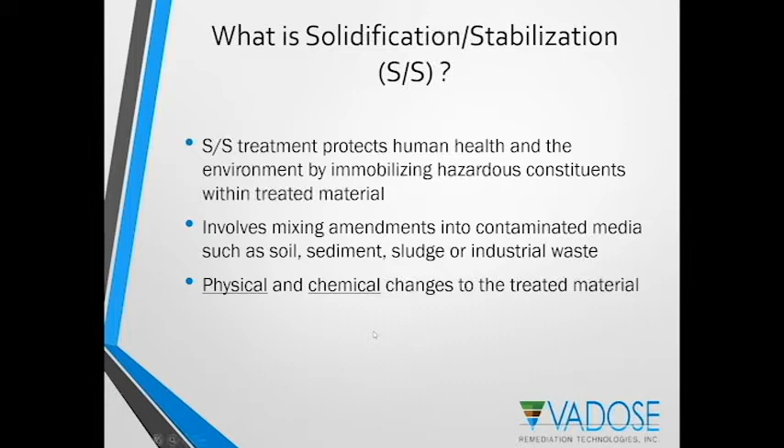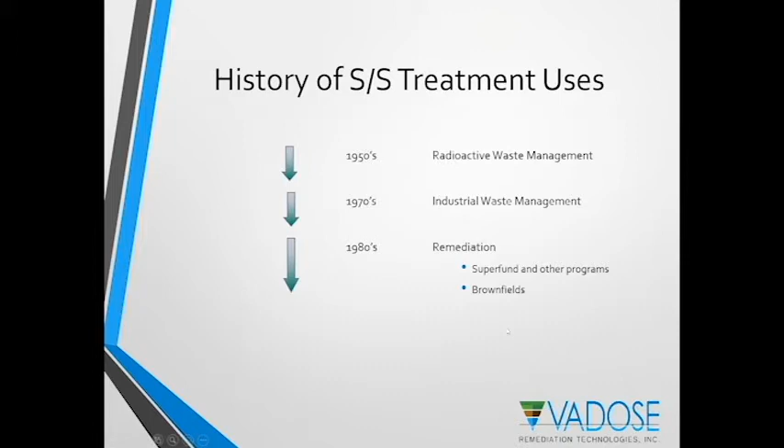First, a little history on solidification and stabilization. This technology has been around for quite a long time, having been used in the 1950s for stabilization of radioactive waste, later adopted in industrial waste management in the 1970s, and then in the 80s used in more remediation applications at Superfund and other environmental remediation projects.

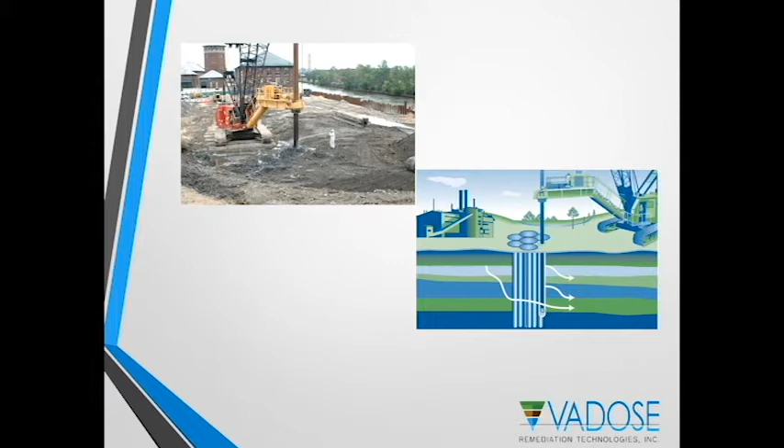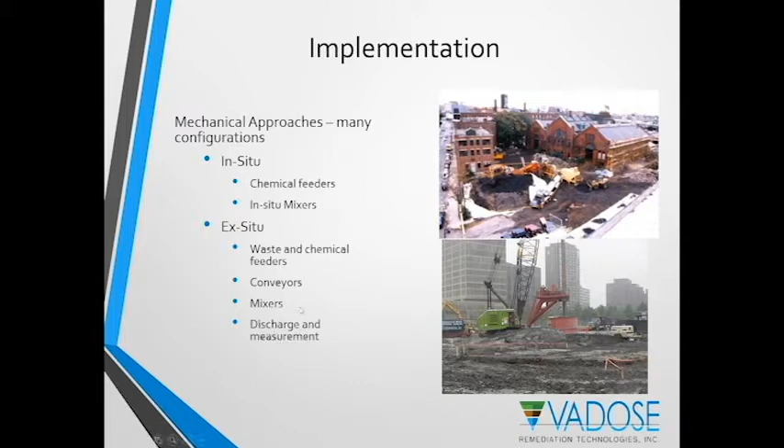It can be done in a number of different ways, typically mechanically mixed for in situ applications, which would involve chemical feeders ultimately feeding these amendments into the mixing head so that amendments would mix uniformly into the soil. Solidification or chemical stabilization can also be done in ex situ applications, which may involve chemical feeding and other mixing equipment.

Some basic principles of stabilization: for organic contaminants, the primary objective is to enact physical changes to the media, essentially things like compressive strength or permeability. We want to affect those properties of the media to result in reduction of mobility of those contaminants. Secondarily, chemical changes might also be enacted, which might include in situ geochemical stabilization or reducing the leachability of certain contaminants from the soil.

For inorganic contaminants, typically the primary objective is chemical change, which might mean adjusting the pH to reduce the leaching of contaminants such as metals, and secondarily the objective might be to chemically solidify in place the contaminants. The chart on the right illustrates the amphoteric nature of various metals. For example, lead between pH 9 and 10 has the lowest solubility. So by controlling pH, we can stabilize that material and reduce its leachability.

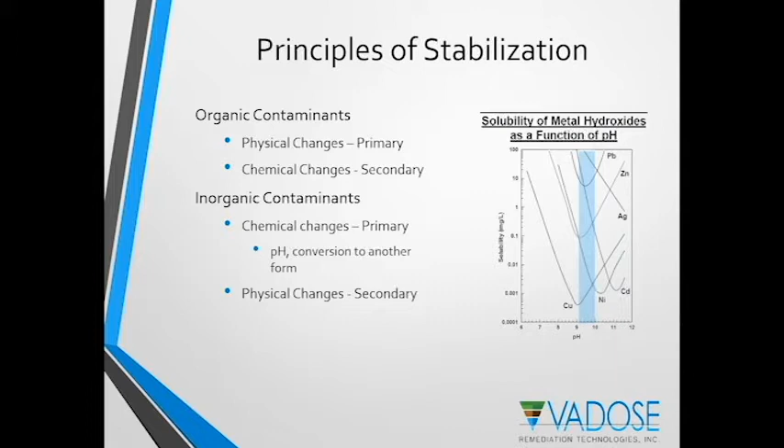Some typical tests done in the feasibility and mix design process include, for physical testing, hydraulic conductivity - that's the picture in the middle showing triaxial permeameters measuring the rate of flux of water through the solidified sample. We also test unconfined compressive strength. Other tests might include freeze-thaw durability or wet-dry durability, free liquid tests such as the paint filter test, moisture content, and density.

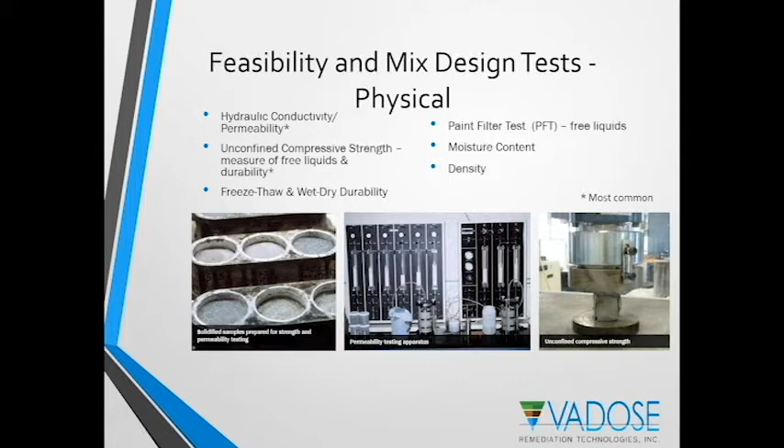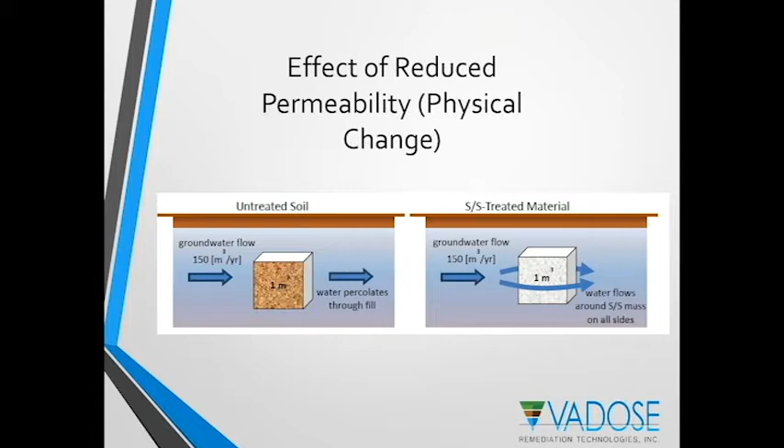The purpose for reducing the permeability is to reduce groundwater contact with that solidified mass. As the illustration shows, as groundwater percolates through a contaminated mass, it picks up contaminants as it flows through. By reducing the permeability, you're able to redirect that flow around the solidified soil mass, reducing the mobility of those contaminants.

Some typical physical performance properties evaluated: I mentioned unconfined compressive strength - often the design might call for a compressive strength of 50 psi. It is very much site specific, and not always a requirement depending on how the site will ultimately be used. Hydraulic conductivity, or permeability of 1 times 10 to the minus 7 centimeters per second, is a typical goal for solidified soil with organic contaminants.

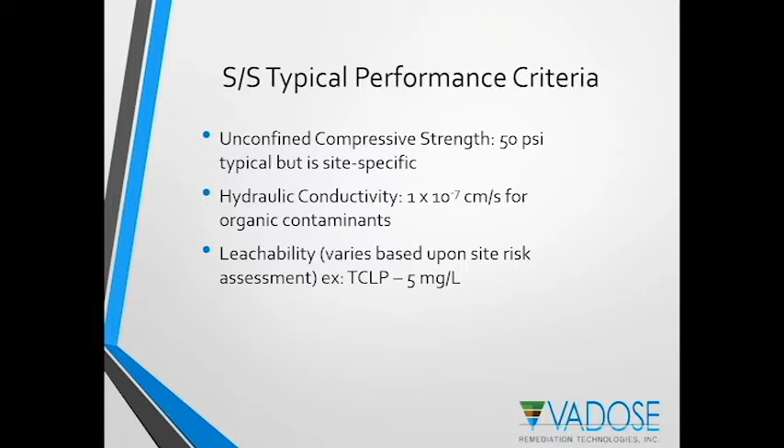And finally, leachability - the ability of these contaminants to migrate out of the mass. An example is the TCLP test for metals. If you have more than 5 milligrams per liter of leachable lead, for example, that's a performance criteria showing that soil would be considered hazardous waste.

Further to leaching testing for chemical analysis of these solidification or stabilization methods, I've mentioned the TCLP. Essentially, the toxicity characteristic leaching procedure is intended to evaluate whether the waste is considered toxic, hazardous, or non-hazardous, depending upon that criterion. This involves using organic acid and essentially percolating it through a crushed monolith, intended to be a 100-year simulation of materials that had been co-disposed with organics in a municipal solid waste landfill.

The next test is the synthetic precipitation leaching procedure, or SPLP test, method 1312. This test uses an inorganic acid with a pH of 4.2, also on the crushed monolith. That pH can be adjusted to be more representative of precipitation in a particular part of the country. This test too is intended to be a 100-year simulation, to simulate leaching from repetitive exposure to acid rain. This might be a more appropriate test to run if you're simulating materials that had been stabilized and left in place, rather than trying to determine if it is characteristically hazardous or not. So an SPLP test might be chosen instead.

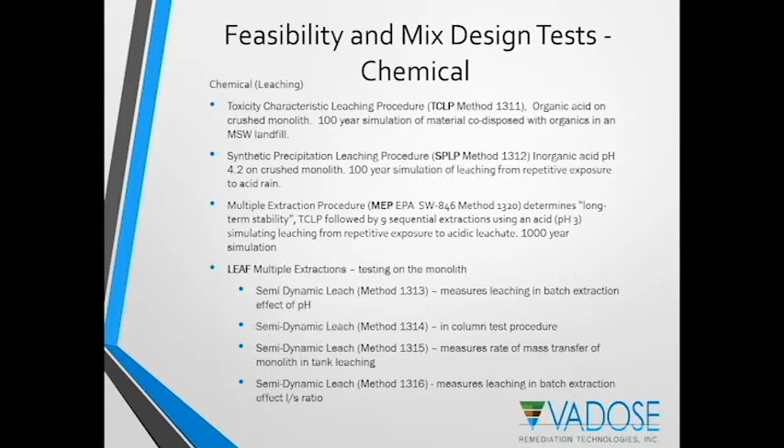So essentially, depending upon how much liquid there is in relationship to the solid, how does that affect leaching of these contaminants? A little bit more about the LEAF method, specifically the 1315 method: it's been developed to determine the mass transfer release rates of the COCs from a low permeability material under diffusion-controlled release conditions. As I said, it's one of 4 different LEAF methods which were developed as a collaboration between the US EPA and a number of other research organizations.

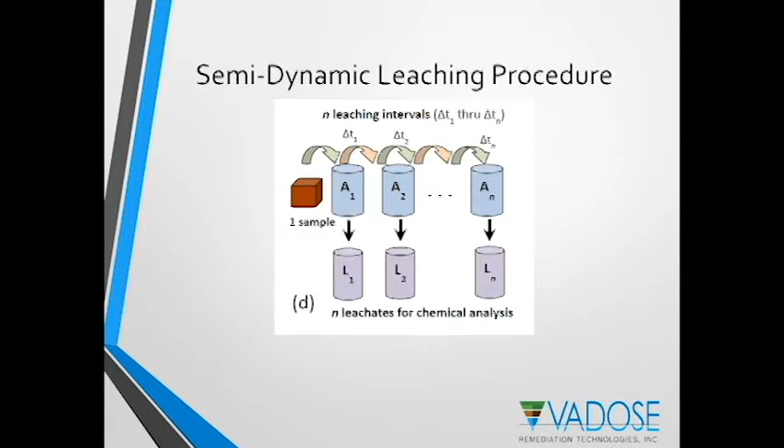Just an illustration of that: essentially, as we've described, you're taking multiple extractions from the solidified mass, depending upon what you're evaluating for, over N number of intervals, and using that data to determine the performance of the solidification and stabilization. So what are these agents that are used for solidification and stabilization?

Portland cement is a generic material. It's been produced by a number of companies all over the US and all over the world. Obviously, the cement is used—it's the same cement used in the creation of concrete, which contains Portland cement and aggregates as well as water. In this case, we're using the cement in a solidification and stabilization application.

It's been used for a long period of time. Portland cement is very commonly used to immobilize the contaminants. As we know, it sets up and creates a high compressive strength, and when it's stabilized in a solidified monolith mass, it is low in permeability as well. These materials are manufactured to standards created by the ASTM and the Portland Cement Association, ACI, American Concrete Institute, so therefore you can expect very uniform, very high uniformity there.

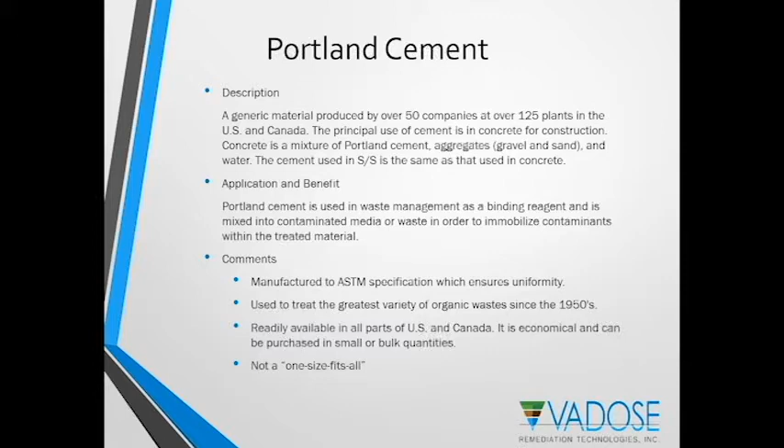They're readily available, but it's not necessarily true that Portland cement is the magic bullet that fits all solidification and stabilization applications. We're going to talk about stabilization of PFAS compounds, and we're going to see the effect that Portland cement has on that. It's some interesting data which I'll be sharing with you later in the presentation.

The next amendment used in solidification and stabilization is sodium bentonite. This is a high swelling clay composed of the mineral sodium montmorillonite. It's often used as an additive to Portland cement mix designs to further reduce hydraulic conductivity. It too is produced to specifications consistent with the API, American Petroleum Institute, and is available from various manufacturers around the country in a wide range of particle sizes for various applications.

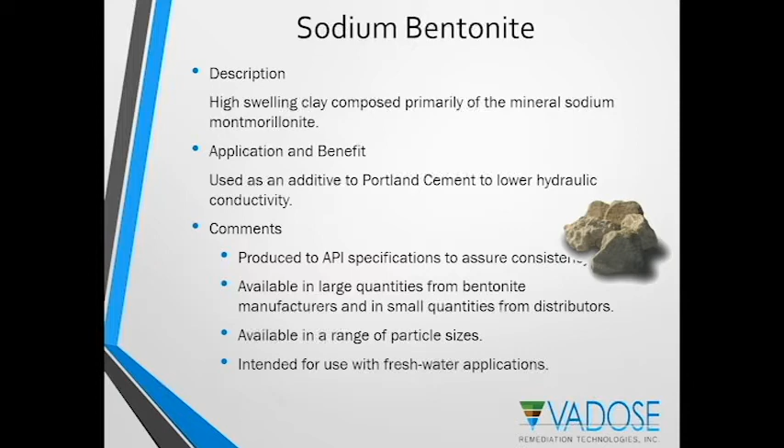Typically in an in situ stabilization application, you would use a powdered size grain and mix it into a slurry. One thing to note about bentonite is that it's intended for use in freshwater applications. It's important to know that sodium bentonite doesn't hydrate and turn into a slurry nearly as well in the presence of salt water as it would in fresh water.

The next amendment we'll talk about is organoclay. This is a sodium bentonite that's actually been treated and converted from being hydrophilic to organophilic, so it no longer wants to soak up water. In fact, it will repel water, and it works as a filtration media. This material is used in filtration applications to remove organic contaminants, especially separate phase organic contaminants from waste streams. So it's got a high affinity for these organic contaminants.

So when it's used as an additive with Portland cement, it will reduce the leaching of those organic contaminants from a stabilized or solidified mass. The manufacturers are able to provide quality control documentation on it. There is very good data showing its ability to reduce leaching of non-aqueous phase liquids at relatively low addition rates, say 2 to 4%, and it's available in a powdered form.

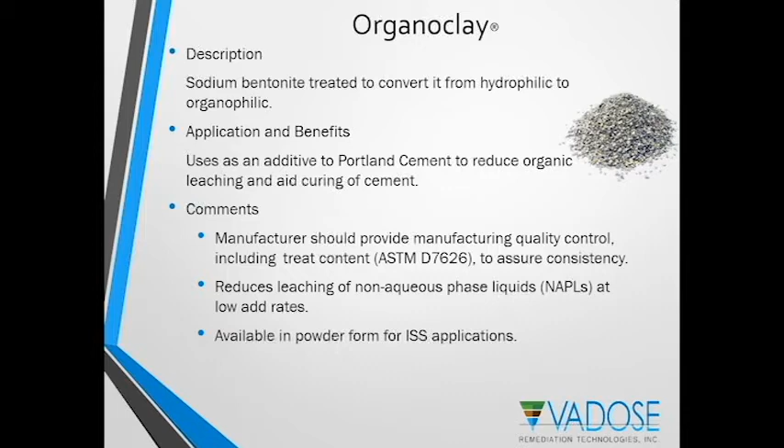There are in fact models for predicting leachability of these organic contaminants from solidified mass when Portland cement and organoclay are used together. A variety of different US EPA guidance documents have been written which include discussion on the use of organophilic clay in solidification stabilization applications. Rather than read all this information, just know that these documents are out there and you can read more about the use of organoclay in ISS applications.

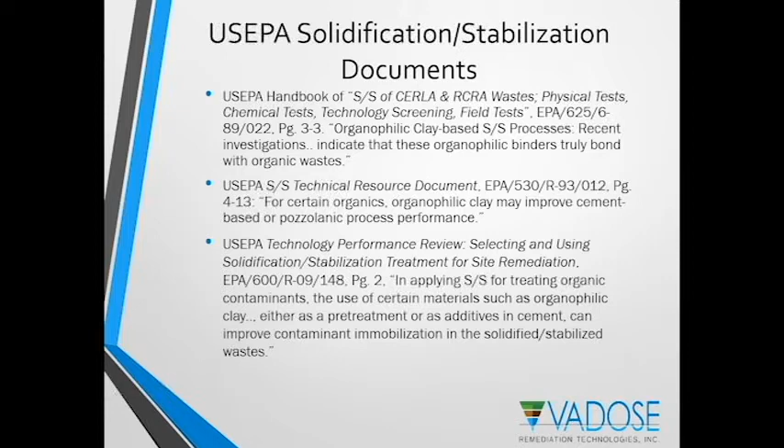The next technology I'm going to talk about is Blastox. This is a fine-grained calcium silicate material. It's designed to reduce leaching of metals from soils and can be used in either an in situ or ex situ stabilization application. The idea initially is to ensure that the materials will pass a TCLP test and render them as non-hazardous waste. But more recently, Blastox has been used in in situ stabilization applications for stabilizing those metals and reducing leaching of those metals.

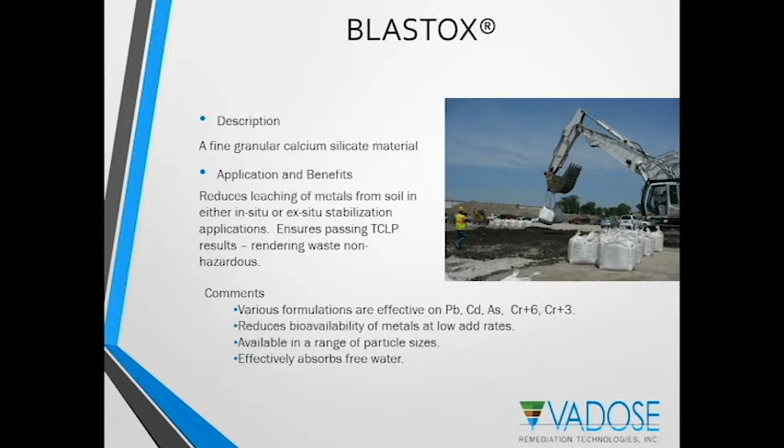There are a variety of different formulations of Blastox that are effective on a range of metals, from chromium, cadmium, lead, arsenic. There's good data showing that by adding this calcium silicate to these metals, it can reduce the bioavailability of these metals as well, so we can reduce both leaching and bioavailability. These materials are available in a range of particle sizes and also effectively absorb free water.

How does it work? It actually has three different mechanisms by which Blastox works. First, it releases alkali to adjust the pH. As we've talked about, hitting a pH range between 8 and 11 is ideal for reducing and slowing the metal dissolution, so putting that soil in the proper range will help reduce leaching.

It also chemically converts through an addition and substitution reaction, essentially complexing with the lead to form a less soluble form of it, for example a lead silicate. Finally, it works through a micro and macro encapsulation process where the soils essentially crust up and become lower in permeability. As we've discussed, reducing the flow of water through the waste will result in less contact with the contaminants and less leaching.

So the point being, there are multiple mechanisms that are effective at improving the performance of Blastox and reducing the liability related with metals.

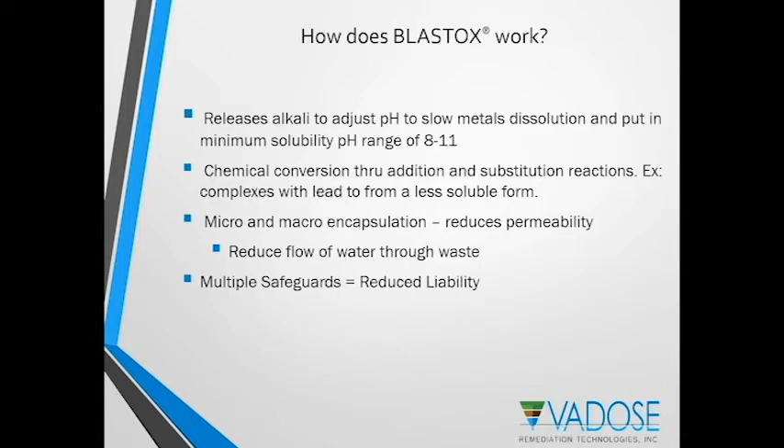Some additional testing has been done to demonstrate long-term stability of blastox. We've talked about TCLP for characterizing the waste, and the MEP method for long-term stability. This method uses an acid with a pH of 3 versus 4.88 for a typical TCLP test, and it's an additional 9 sequential cycles of extractions. This test is designed to eliminate the buffering capacity that comes with a pH adjustment, so that it demonstrates the pH adjustment isn't the sole safeguard protecting or preventing leaching.

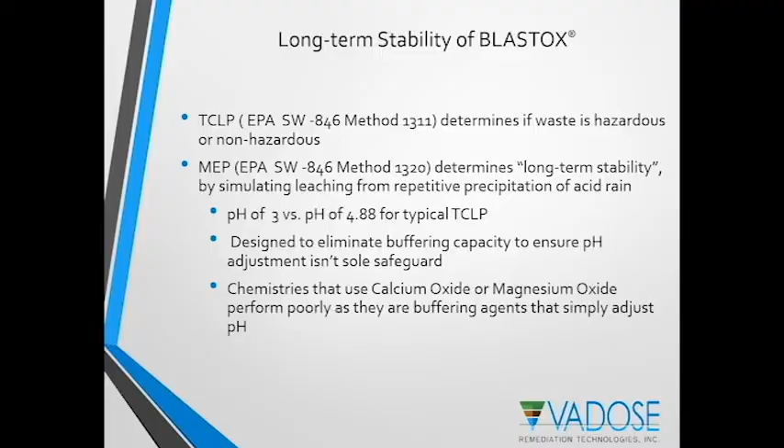Some chemistries, such as calcium oxide or magnesium oxide, have performed poorly as they are strictly a buffering agent and simply adjust the pH. Once that pH buffering capacity has been exhausted, the leaching will begin. However, several federal agencies have tested blastox chemistries in various ways. The US EPA, the Federal Highway Administration, and the Department of Defense have all tested the technology and concluded that they're very stable and durable, even when tested using the MEP for long-term durability.

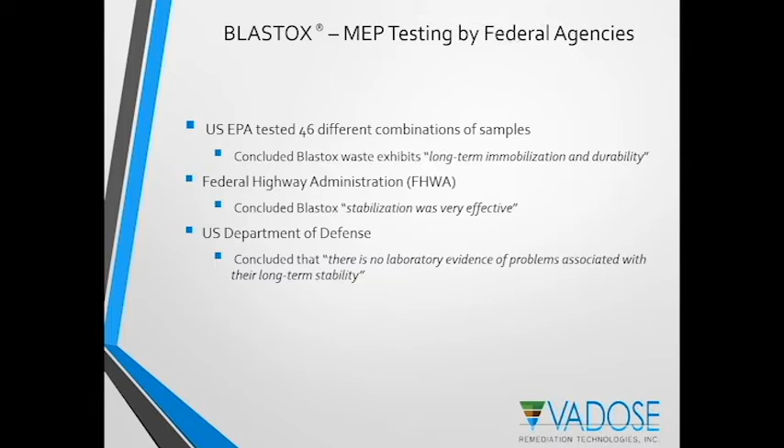The method of installation for ex situ applications, or method of application, is simply to consolidate the surface soils and then apply the blastox at the appropriate dosage rate. Treatability studies are conducted in order to verify the appropriate dosage rate to ensure that leaching will be below the maximum allowable. Then the materials are mixed together using a mixing head on the end of an excavator to ensure uniformity. If a backhoe were to be used, turning it over 5 or 6 times with a backhoe would be suitable enough to create that mixing.

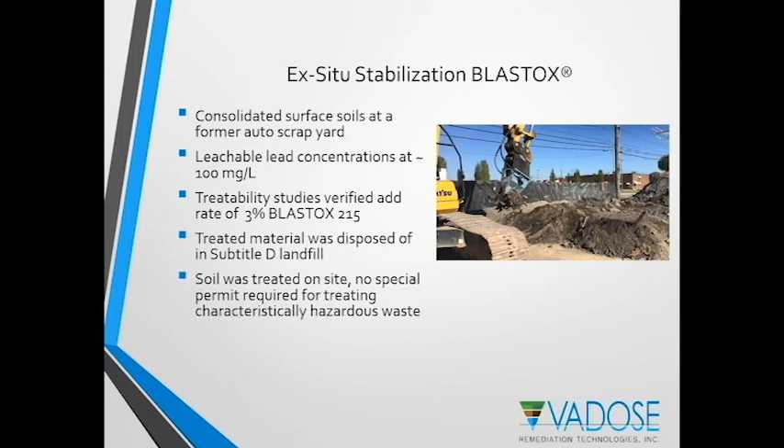But there is no waiting for samples to cure. Essentially, as soon as the materials are mixed together, they can be sampled, taken to the lab, and tested. The materials are available in bulk bags and also by bulk delivery in pneumatic trucks. Again, it's mixed thoroughly with the soil, no residence time required. After mixing, the samples are collected and sent to the lab.

Other methods of mixing could also be used, such as a pug mill or some form of continuous feed process. For in situ applications specifically, you might apply the blastox to the top of the soil or lift that you're planning to treat, and then mix that material in place, again with an excavator, turning it over 5 or 6 times. Other equipment that could be used for that application is something like a hollow stem rotary auger or similar equipment, such as shown in the middle illustration there. The ALLU equipment has a separate tank for the amendment, which is pneumatically blown down the stem of the mixing head and then introduced to the soil as it's mixing.

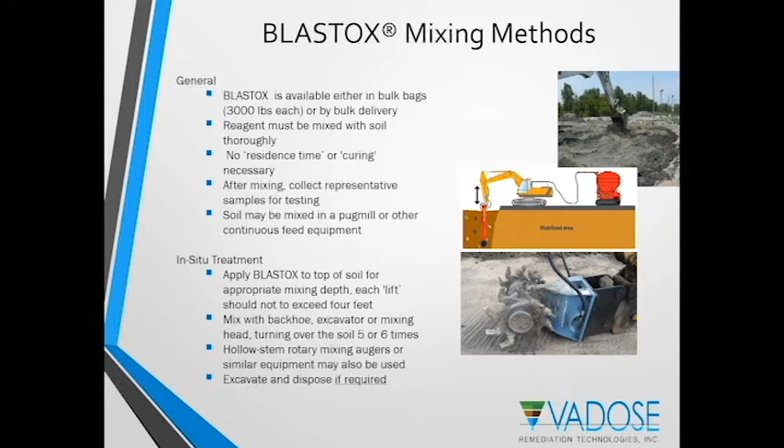Some additional laboratory test data. This is data that was presented at the Battelle Chlorinated Conference in 2018 by Robert Thomas of GHD. In this case, they were doing treatability studies to stabilize lead at a former oil refinery. They took 150 grams of soil and mixed it with various reagents, placed them in molds, and allowed them to cure for 21 days. This wasn't necessary if it were strictly blastox, however most of these samples included the use of cement as well. Then they conducted TCLP tests to determine leachability and evaluated which were the most effective amendments.

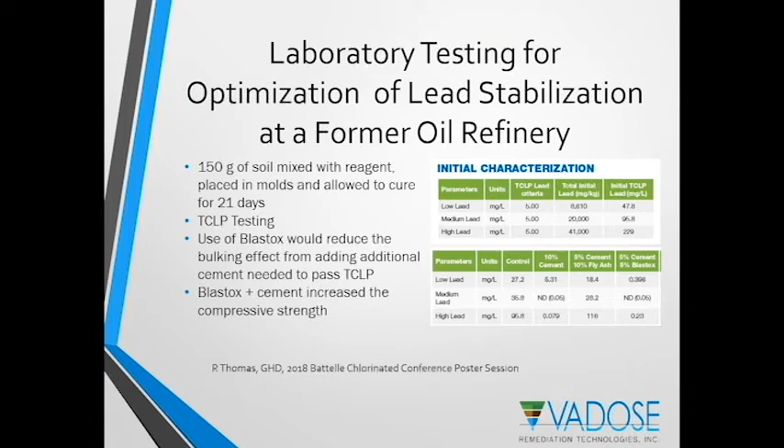Just some final thoughts about in situ stabilization of various materials, specifically metals. These treated soils, we've been using Blastox for stabilization of chemicals and leachability of metals for a long time, characteristically rendering them as non-hazardous.

However, more recently, we've seen an interest in in situ applications. Certainly the market is changing, and the economics of being able to treat soils and leave them in place is beneficial to remediation. It really is very much dependent upon state and local requirements for whether that would be allowable. I happen to be in Illinois, and they seem to be fairly favorable to this option of treating metals-contaminated soils for in situ stabilization.

It's mentioned it can be mixed with cement to improve the compressive strength, but that's not necessarily required.

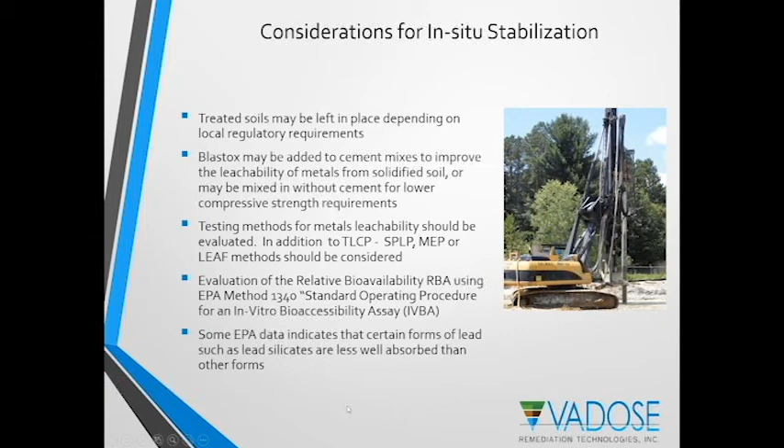I would imagine by now most everybody has heard about the forever chemicals we refer to as PFAS, a very wide range group of chemicals. These chemicals are bioaccumulative and persistent and don't break down very readily, and so they're kind of the latest class of environmental concerns.

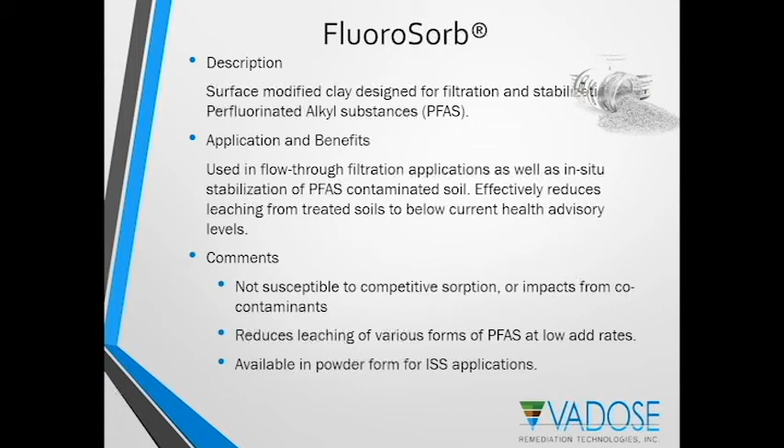Data has shown, which I'm going to present, that adding FluoroSorb at very low rates can significantly reduce the leaching of PFAS to below the current health advisory levels. This material is also available in a powdered form for in situ stabilization applications.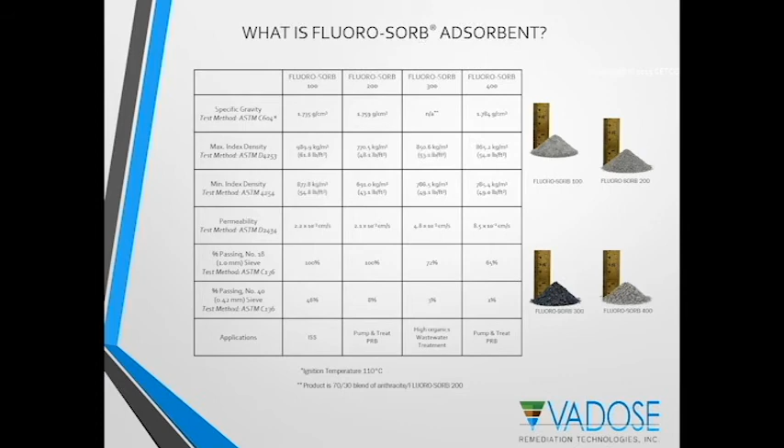This chart basically gives a range of the different products that are available. However, as we've mentioned, the first column here, Fluoro-Sorb 100, is the one that would typically be used in in situ stabilization applications.

So going on to some work that has been done on Fluoro-Sorb, this first study was by Peter Storch of Arcadis in Australia, presented at the proceedings of a cleanup conference in Melbourne, Australia in 2017. Essentially, some leaching testing was done, first on the control sample, which had 228 milligrams per liter leaching of total PFAS compounds. The second control, when stabilized with cement, reduced that number to 1.17 milligrams per liter. A proprietary blend of aluminum hydroxide and carbon was added as an alternative and was able to reduce the leaching to 0.75.

But interestingly, when that was blended with cement, the leachable PFAS was actually higher than the control sample. It's an interesting phenomenon we'll see again, and we'll talk about what that might be.

We think this is either an effect of pH or possibly the heat of hydration causing some volatilization of these PFAS compounds. When Fluoro-Sorb was added, the total PFAS was reduced to 0.3 milligrams per liter, and Fluoro-Sorb with cement had the best performance at 0.04 milligrams per liter.

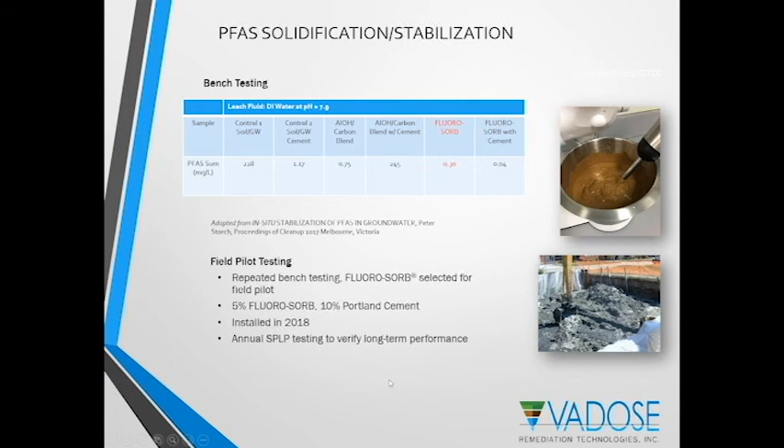We did go to a university and have some additional testing done to verify the performance of the Fluoro-Sorb media. This slide shows some characterization of the soil that was used at University of Texas to do this leach testing of Fluoro-Sorb in this particular soil.

As you can see, the total leachable PFAS in the soil was approximately 40,000 parts per trillion. There were various different PFAS compounds in the soil - I think 32 listed there, many of which were above that 70 parts per trillion health advisory level.

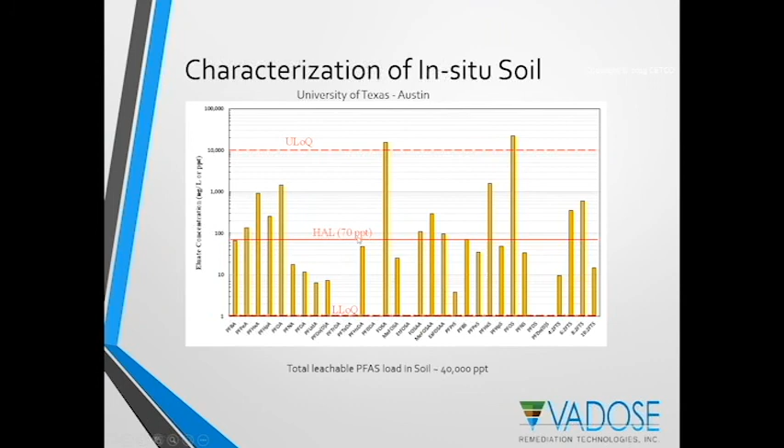This slide illustrates the results in a nutshell. That orange dot on the top left represents the total soil-only leachable PFAS, summed across all 32 PFAS compounds, approximately 40,000 parts per trillion.

Looking at the curves, this gray curve at the top is 0% Fluoro-Sorb, so essentially just the Portland cement. The x-axis represents the addition rate of Portland cement. You can see Portland cement was effective initially, reducing the leachability of the PFAS, but then there's this tailing upward effect. Again, we believe this is a result of either pH or possibly heat of hydration.

When we blended Fluoro-Sorb in at as low as 1%, Fluoro-Sorb 100, with these various different portions of Portland cement, we got significant improvement in the leachability of these PFAS compounds. At one formulation, 5% Portland cement, we were able to get below the health advisory level of 70 parts per trillion. But again, we see that effect where it tails upward again when there's an increase in Portland cement.

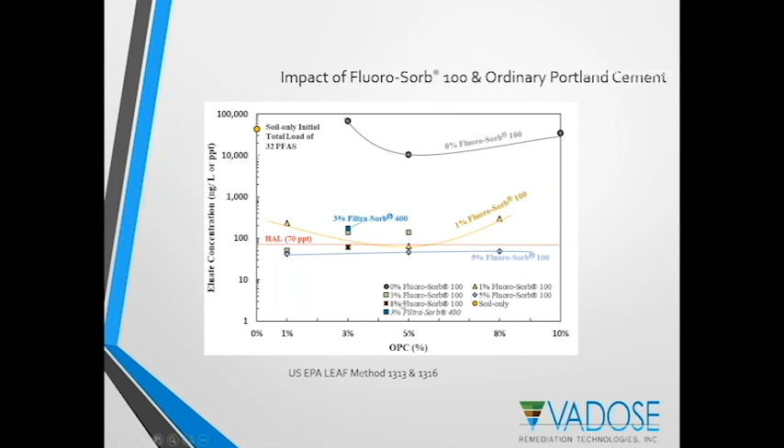Now, some of the conclusions from the University of Texas study were that really all of the PFAS were reduced to low concentrations for all of the mix designs that contained Fluoro-Sorb 100, regardless of the ordinary Portland cement content. So the point is that this wide range of 32 different contaminants were all effectively reduced.

Ordinary Portland cement alone was not effective in stabilizing these same constituents. This is an important point I made at the beginning of the presentation, that you cannot expect to use cement in an ISS application for PFAS compounds and assume it will have a positive effect on reducing leachability.

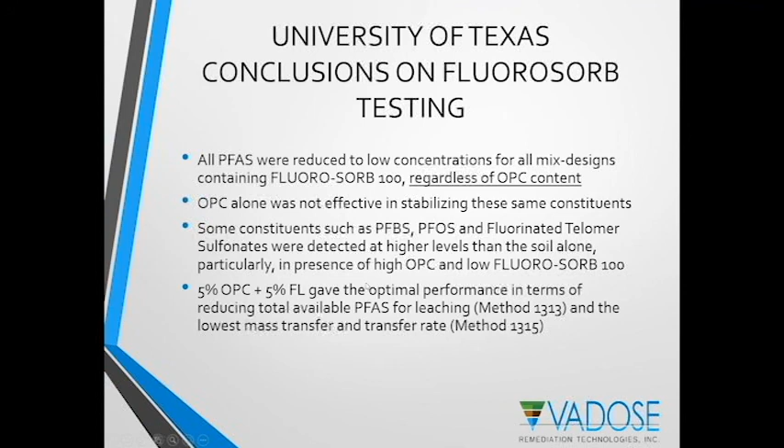Next, some of the constituents specifically were detected at even higher levels than in the soil alone. This is that point that Portland cement, in fact, increases the mobility, or appears to increase the mobility, of certain compounds. Finally, a mix design of 5% Portland and 5% Fluoro-Sorb gave the optimal performance when tested using method 1313 and 1315.

So with that, I've given you a summary overview of solidification and stabilization applications, including the history, typical application methods, and test methods for physical and chemical properties. We've provided an overview of various different amendments commonly used in solidification and stabilization applications for organic and inorganic compounds, and we've introduced a few new amendments that have shown good promise in stabilizing metals, as well as this new class of compounds, PFAS.